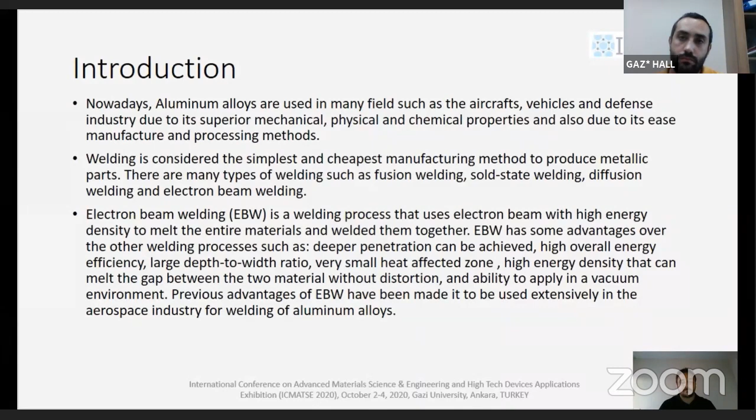Electron beam welding is a welding process that uses electron beam with high energy density to melt the entire materials and weld them together. Electron beam welding has some advantages over other welding processes, such as deeper penetration can be achieved, high overall energy efficiency, large depth-to-width ratio, very small heat affected zone, high energy density that can melt the gap between the two materials without distortion, and the ability to apply in a vacuum environment.

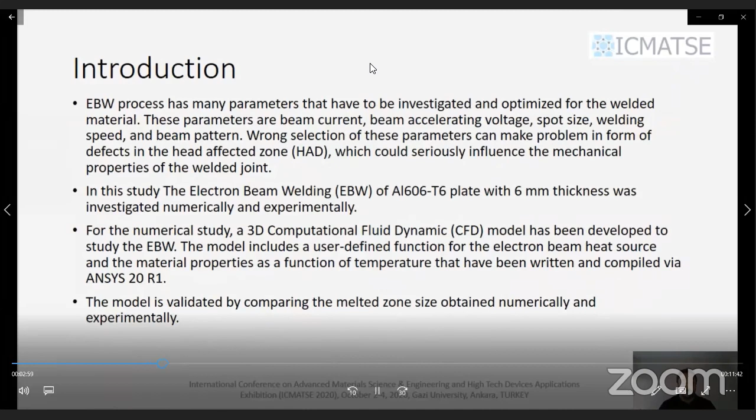Previous advantages of electron beam welding have made it useful extensively in the aerospace industry for welding of aluminum alloys. Electron beam welding process has many parameters that have to be investigated and optimized for the welded material. These parameters are beam current, beam accelerating voltage, spot size, welding speed, and beam pattern. Wrong selection of these parameters can cause problems in the form of defects in the heat affected zone, which could seriously influence the mechanical properties of the welded joint.

In this study, the electron beam welding of aluminum 6061 with the T6 condition plate, with 6 millimeters thickness, was investigated numerically and experimentally. For the numerical study, a 3D computational fluid dynamics model has been developed to study the electron beam welding. The model includes a user-defined function for the electron beam heat sources and the material properties as a function of temperature, which have been written and compiled via ANSYS 20 R1 software. The model is validated by comparing the melted zone size obtained numerically and experimentally.

Here is the model development section. The heat transfer from the electron beam sources to the specimens is simulated in the developed CFD model by using the heat transfer module in ANSYS Fluent software.

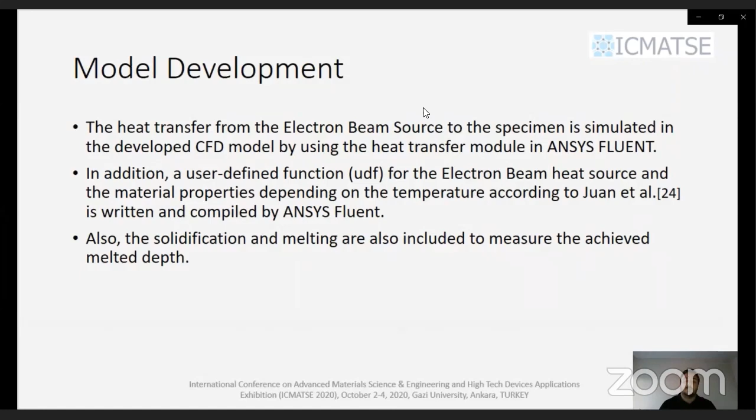In addition, a user-defined function for the electron beam welding heat source and the material properties depending on the temperature, according to Juan, is written and compiled by ANSYS Fluent software. Also, solidification and melting are included to measure the achieved melted depth.

Heat transfer model. The heat transfer from the electron beam source to the specimen can be described by the energy equation. The energy equation's parameters depend on variables such as temperature, density, specific heat, thermal conductivity, and electron beam heat sources.

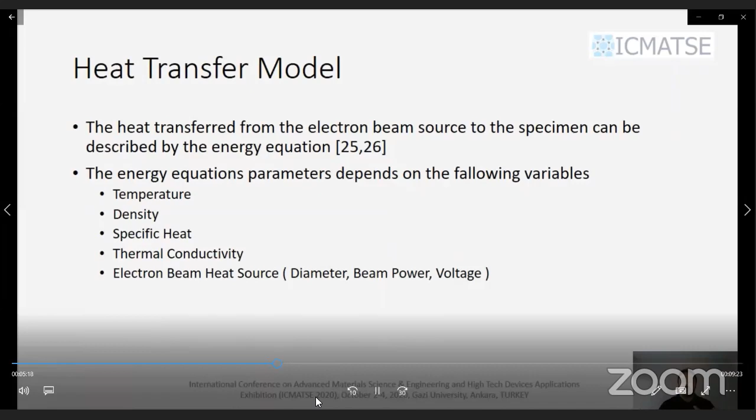The electron beam heat source depends on beam diameter, beam power, and voltage. Melting and solidification module: melting and solidification are taken into account, and the enthalpy technique is used to describe the melting and solidification that occurs during the welding process. The enthalpy technique is based mainly on the enthalpy of the material.

Here is the equation: H is equal to U plus P times V, or H is equal to minor H plus delta major H, where U is the internal energy, P is the pressure, V is the change in volume. Minor H is the sensible heat and delta H is the latent heat.

So minor H is equal to minor H reference plus Cp times delta T. Delta major H is equal to beta times L, where minor H reference, L, Cp, and beta are the reference enthalpy, the latent heat, specific heat, and the liquid fraction in the material respectively.

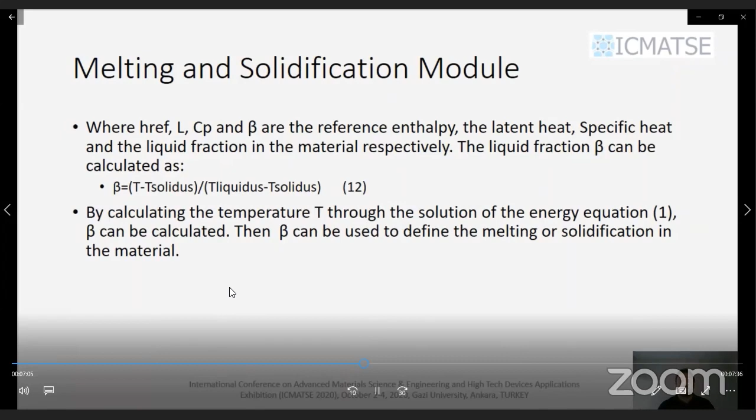The liquid fraction beta can be calculated as beta equals (T minus T solidus) over (T liquidus minus T solidus). By calculating the temperature T through the solution of the energy equation, beta can be calculated, and beta can then be used to define melting or solidification in the material.

Numerical solution: the equations described on the previous slides, including the heat transfer, solidification, and melting equations, are solved using ANSYS Fluent 20R1 software. Also, a user-defined function code that contains the electron beam welding parameters such as electron beam diameter and welding speed is compiled and solved. To validate the model, the obtained results are compared with the experimental results.

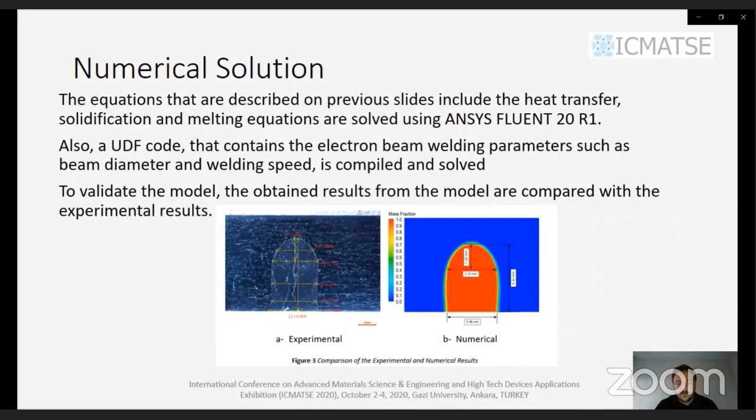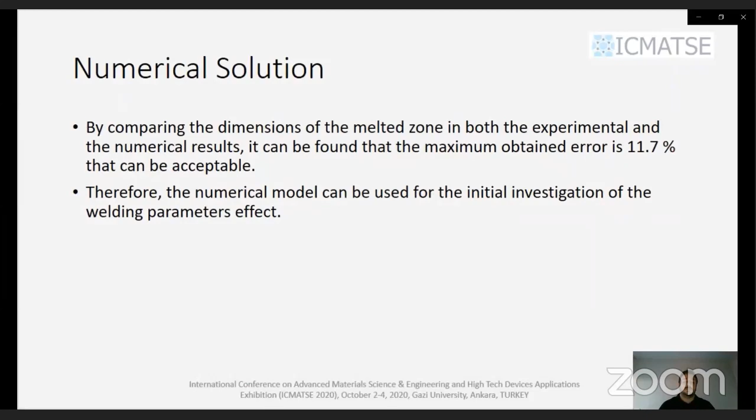Here you can see our calculated welding width is around 3.48, and the real one is 4.46. By comparing the dimensions of the melted zone in both the experimental and numerical results, it can be found that the maximum obtained error is around 11.7%, which is acceptable. Therefore, the numerical model can be used for the initial investigation of the welding parameters' effect.

Results and discussion. The numerical results from the computational fluid dynamics model can be used as a guide through the experimental work. The values of current, voltage, and welding speed are investigated through the model to make sure they can melt the whole thickness of the specimen.

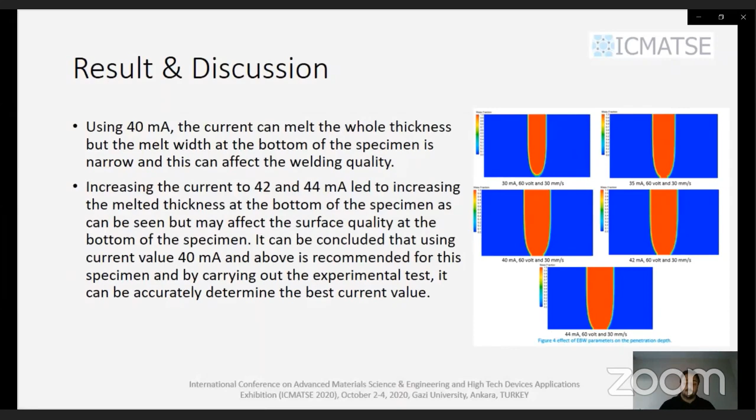For the experimental study, a 6 mm thick aluminum 6061 T6 condition aluminum alloy was used to prepare the welding specimen in the form of a tensile test according to ASTM E8/E8M 16A. No defects in the welding path can be seen for the tested specimen, as shown in figure 6.

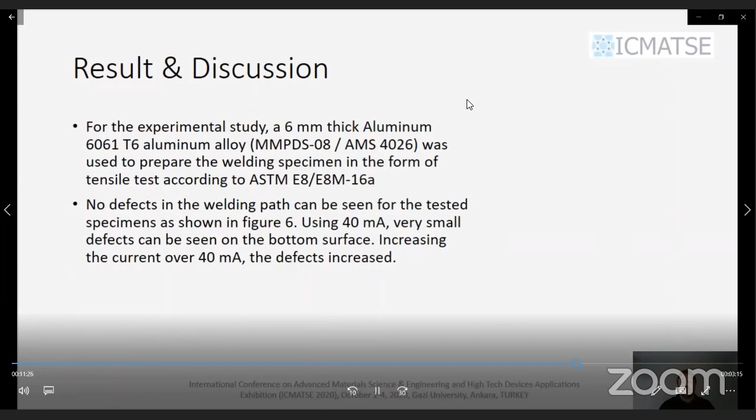Using 40 milliampere, very small defects can be seen on the bottom surface. Increasing the current over 40 milliampere, the defects also increase. Here you can see the results of the experimental values.

Therefore, it can be concluded that optimal parameters for the specimens are 40 mA, 60 volt, and 30 mm per second, based on the visual inspection of the top and bottom surface. More analysis is required to fully optimize the parameters for aluminum 6061 T6 condition.

Based on the micro hardness and tension test, which will be investigated in another study, in conclusion, this study investigated the electron beam welding of aluminum 6061 T6 condition both numerically and experimentally. A CFD model was developed to simulate the EBW process through a user-defined function written, compiled, and solved using ANSYS Fluent 20R1. The results from the CFD model were validated experimentally by comparing the melted zone numerically and experimentally.

Then the results from the model were used as a guide through the experimental work. The main results of this study are summarized as follows. According to the CFD model, using 60 volt, 30 mm per second, and beam current more than 35 mA can melt the specimen thickness. From the experimental work, using 60 volt, 30 mm per second, and beam current more than 40 mA can cause defects on the bottom of the specimen.

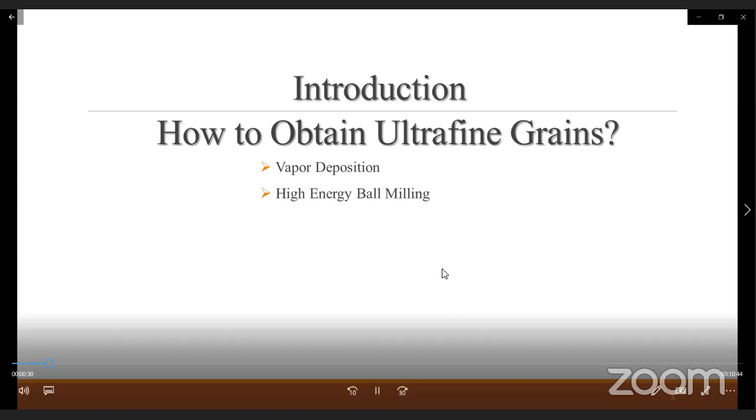We have four different techniques. The first one is vapor deposition, the second one is high energy ball milling, the third one is fast solidification, and the final one, which we are interested in, is severe plastic deformation.

What is SPD? SPD is a method of processing metals to create bulk material comprised of nanostructures. So basically, we turn coarse grains into smaller grains as a result of the SPD.

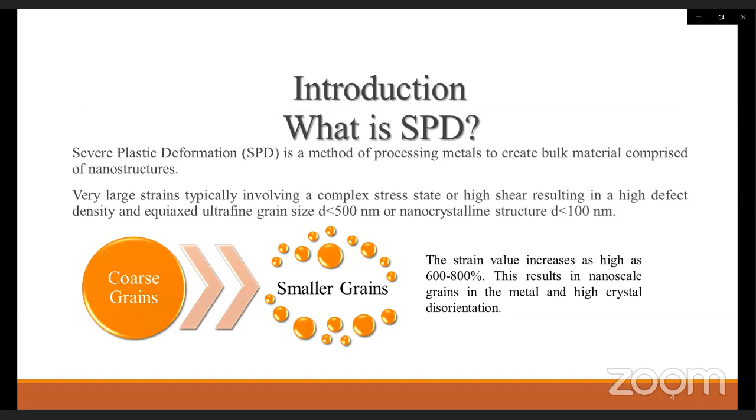As the grains get finer, we get higher strength, and as a result of this, we get fracture toughness. So the ultra-fine grains were obtained using the equal channel angular pressing technique, which is a severe plastic deformation method.

As the grains get finer, the mechanical properties of the material increase significantly according to the Hall-Petch relation, as shown on the screen.

In this present study, 2024 quality aluminum alloy was subjected to ECAP with 1, 2, 3, and 4 pass cycles after solution heat treatment, and then these samples were aged at 175 degrees centigrade for 8 hours. After the aging, the hardness values and optical microstructures of the samples were investigated.

The hardness of the material decreases when 2024 quality aluminum was pressed with ECAP and then aged. The hardness decrease ratio after aging was found to be directly proportional to the sample's number of passes through the ECAP.

So let me explain the ECAP die briefly. We have a billet pressed through a die consisting of two channels with identical cross sections intersecting at an angle between 60 to 135 degrees, with a rounded or zero corner.

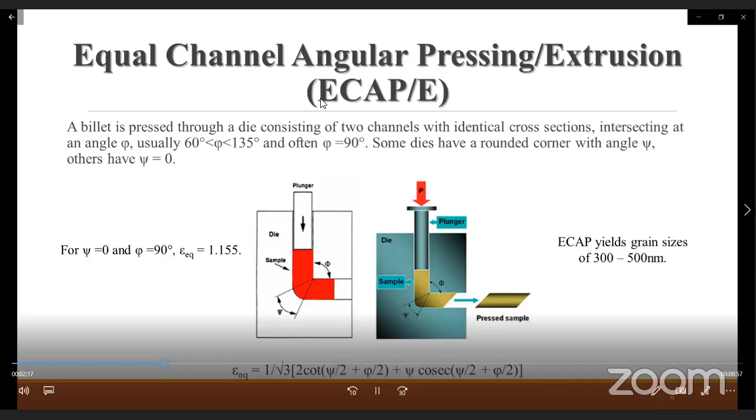And this is the basic strain formula with the angles, and with the 0 and 90 degree values we get the strain of 1.155, and with ECAP we can get 300 and 500 nanometer grain sizes.

For the material and method section, we have used 2024 aluminum alloy in this study. The composition is shown on the table, and the aim of this study is to investigate the hardness and microstructural properties of 2024 aluminum post ECAP aging at 175 degrees for 8 hours.

The ECAP die process is carried out at room temperature with 1 pass, 2 passes, 3 passes, and 4 passes, with an ECAP die having an angle of 135 degrees. The ECAP die's technical drawing is shown on the screen. These are the exact dimensions.

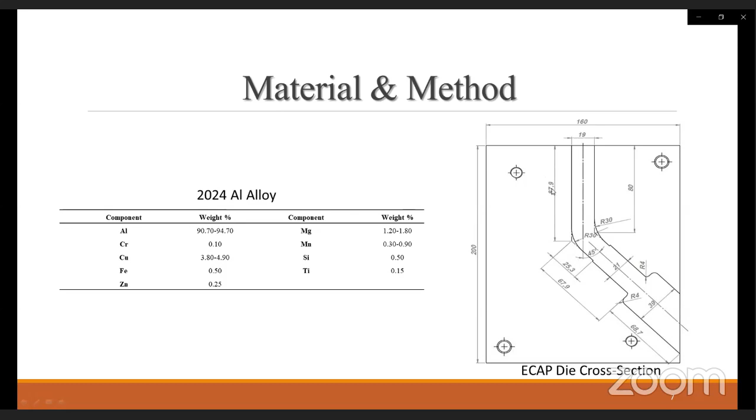After all these works are finished, the die is assembled carefully. The outer shell is also assembled in the die to prevent it opening during operation. The channel has a cross-section with lengths of 19 mm for each side. Hence, the samples are machined to 18.95 mm in the cross-sectional dimension and 40 mm in longitudinal dimension.

Then the ECAP die is assembled as shown. We have assembled this ECAP die into this outer shell. The samples are solutionized at 525 centigrade degrees for 2 hours before ECAP. After solutionizing, the samples are pressed at 12 mm per second and at room temperature.

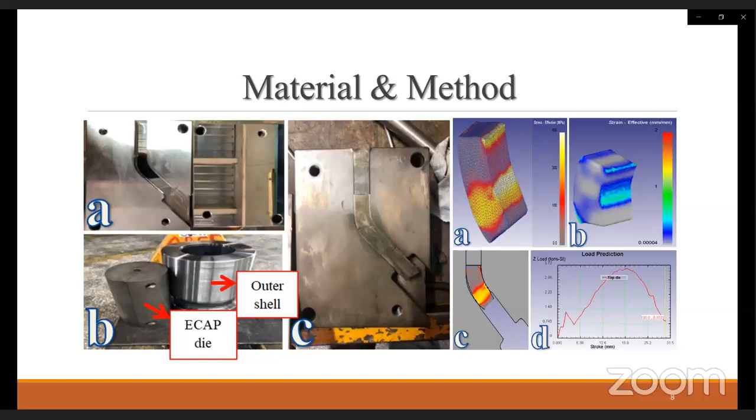Then the aging operation is carried out with the parts. The samples are put in an electrically heated laboratory type furnace and aging is carried out at 175 degrees for 8 hours. After the aging, the microstructures and the hardness values are investigated. First of all, let us see the microstructures.

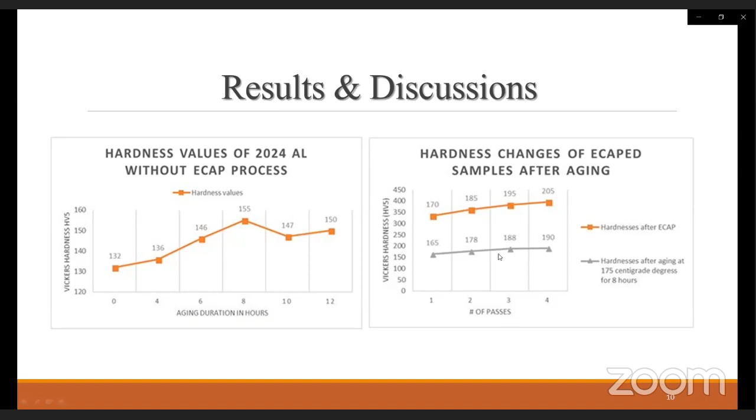As we can see, the decrease in hardness for 1 pass is about 5, while for 4 passes it is 15.

Let us move to the conclusion. ECAP is one of the essential methods for SPD applications. By applying ECAP, grain refinement is obtained through the formation of new high-angle grain boundaries. In addition, high dislocation density is obtained with ECAP. Therefore, the hardness of samples passed through ECAP increases as the number of passes increases.

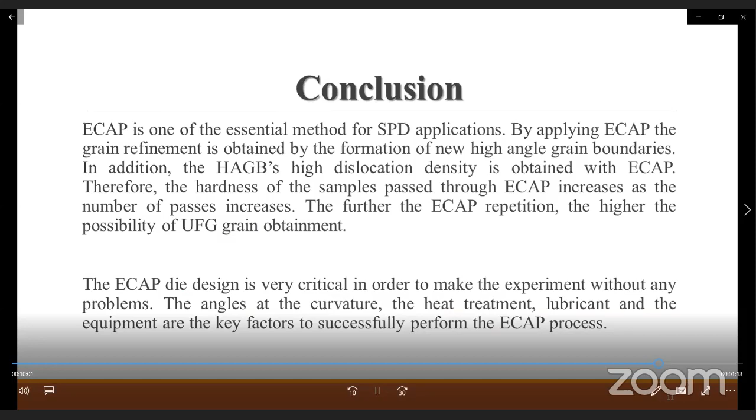The further the ECAP repetition, the higher the possibility of obtaining ultrafine grains. The ECAP die design is very critical for performing the experiment without problems. The angles at the curvature, heat treatment, lubricant, and equipment are key factors for successfully performing the ECAP process.

Aging after ECAP decreases the hardness due to nucleation on segregated atoms located at the dislocation zones. High dislocations could cause overaged conditions in the material, and high dislocation density increases the probability of dislocation annihilation due to the short distances between dislocations.

By using SPD methods, especially ECAP, significant grain refinement and the potential for producing advanced engineering materials with superior properties—strength, ductility, and good fatigue characteristics—can be achieved. These UFG structures lead to increased strength, but may also cause weakening if processing conditions introduce significant changes in precipitate morphology. If the UFGs are reasonably stable at elevated temperatures, there is potential for achieving excellent superplastic properties.

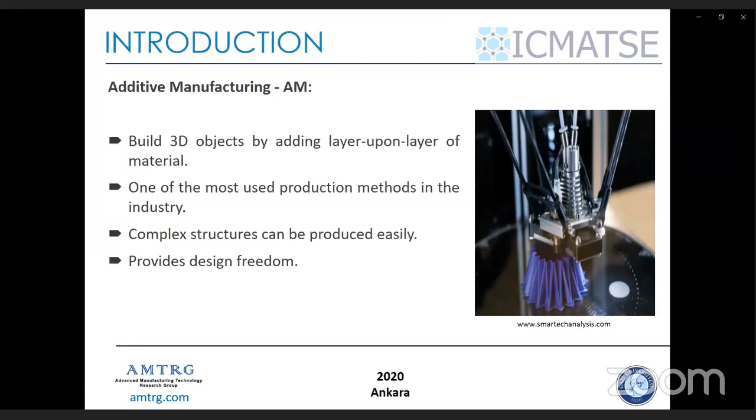Firstly, I want to explain what additive manufacturing is. Additive manufacturing is the process of taking design data from the digital domain and producing it by adding material layer by layer. The most important advantage is that the designer can freely develop a model without questioning its manufacturability.

The additive manufacturing process flow is as follows: 1. CAD 3D model, 2. STL file creation, 3. sliced layers, 4. printing, 5. post-printing processing.

Structural optimization can be defined as the process of choosing the best variable from among applicable solutions. It can be used for weight reduction, maximum rigidity, natural frequency reduction, and maximizing heat conduction. Topology optimization, size optimization, and shape optimization are generally used as structural optimization methods.

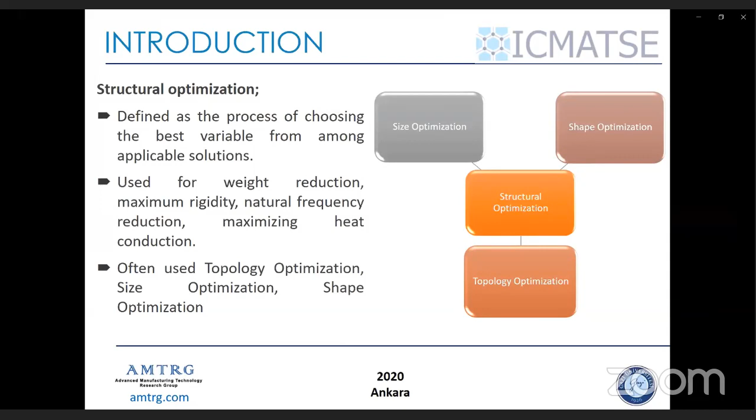We used topology optimization in our study. Topology optimization is used to find the best material distribution on the model and to reach optimum weight by removing materials from unnecessary areas.

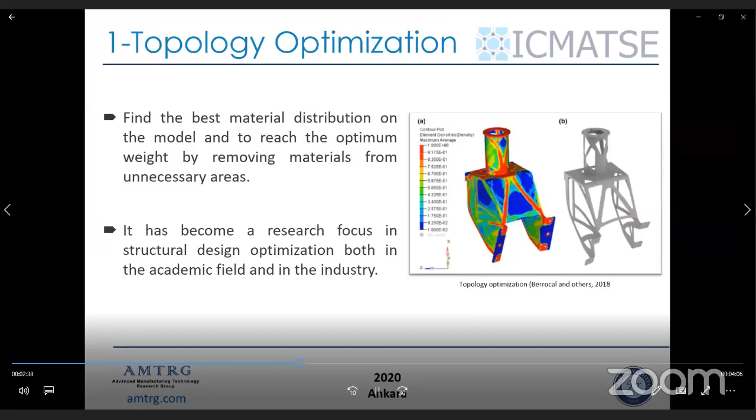We chose a bearing bracket of aircraft for topology optimization. The bearing bracket is a common component in the control surfaces of various aircraft, and redesigning the bracket for additive manufacturing can significantly save weight and help reduce aircraft fuel consumption.

Firstly, we prepared the CAD model and applied mesh structure. Then we divided the model into design and non-design area. Design area was shown with dark blue and non-design area was shown with light blue.

After this is finished, other parameters that should be used during optimization are determined. These parameters may be forces and boundary conditions, constraints, objective function, etc. The desired regions were fixed with one-dimensional rigid elements, and we applied 3 loads in X, Y, Z direction.

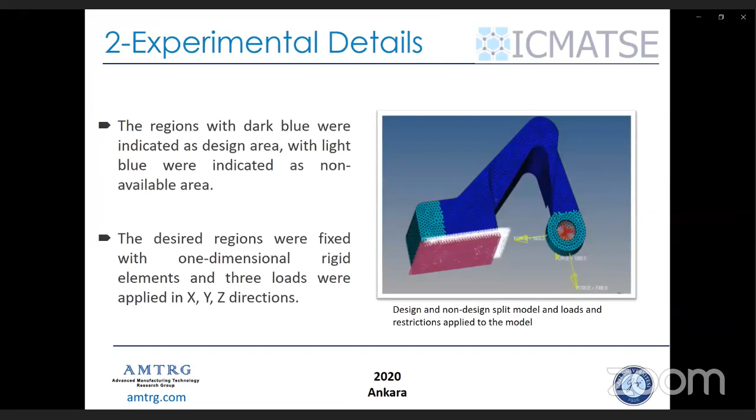We used the OptiStruct module of HyperMesh for topology optimization and static analysis. After topology optimization, HyperMesh gave us this design, and then we prepared our own design by taking this model as an example.

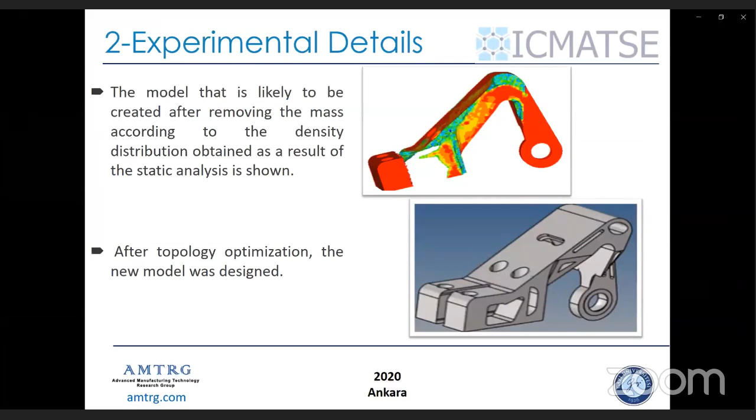After that, we used Netfabb in our study. Netfabb provides a complete workflow from start to finish, and this provides a fast and easy method. Using Netfabb simulation, support materials were defined and production analysis was made.

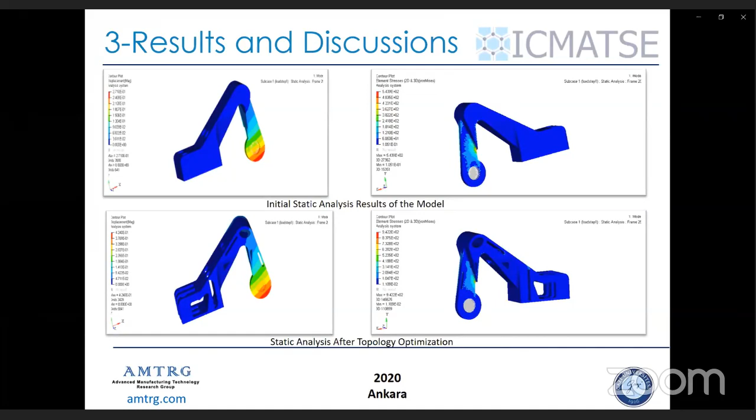Here we have shown our analysis results of both the existing model and the new redesign. Looking at the maximum stress results, it was observed that the stress value increased after topology optimization, but this result is below yield stress and can be neglected.

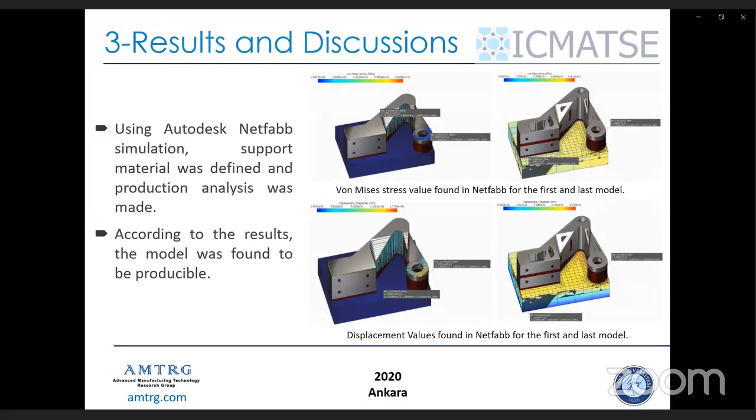I can say there was a 30% reduction in weight, and according to Netfabb simulation results, the model was found to be producible.

In this study, the aim was to show the effect of topology optimization on weight, displacement, and stress, with the analysis carried out and the data obtained. It was observed that there was a 30% reduction in weight.

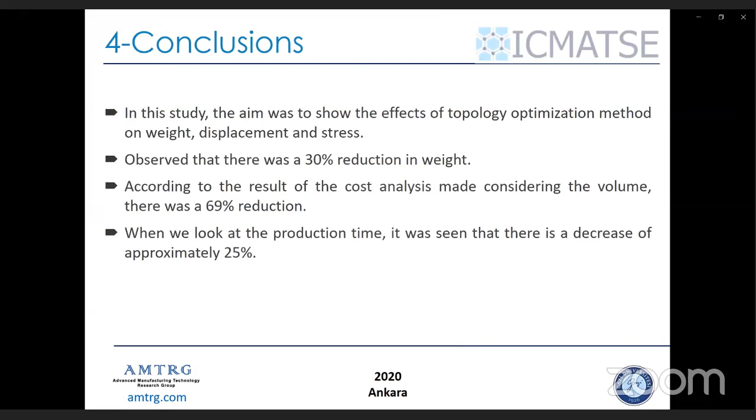Later, we applied cost analysis. We saw a 69% reduction. Finally, when we look at production time, it was seen that there is a decrease of approximately 25%.

Thank you, my presentation is finished.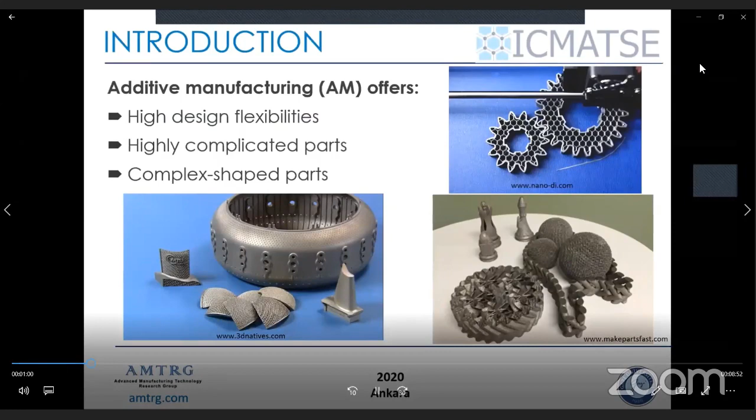Due to these advantages, it has become a preferred method, especially in the fields of aerospace industries, architectural, dental, automotive, furniture, and biomedical.

However, these parts cannot be directly used in the industry without post-processing. The high surface roughness value of these parts is one of the reasons for this situation.

As you see here, there are two samples which are produced by two different additive manufacturing techniques. The material of the first part is Inconel 625 and it is produced with SLM technology, which is selective laser melting, and the material of the second part is a titanium alloy produced with electron beam melting technology.

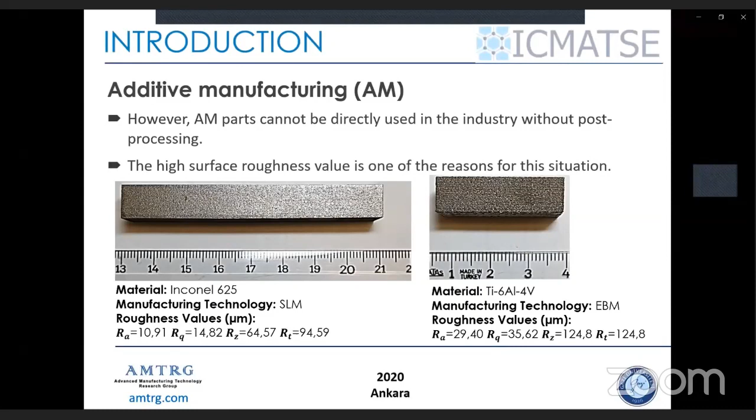So, laser polishing is an innovative part finishing technique that can be used to reduce the surface roughness by melting a thin layer of material on the part surface. Laser polishing involves melting a thin layer of the substrate with surface tension, causing the material to flow from peaks to valleys.

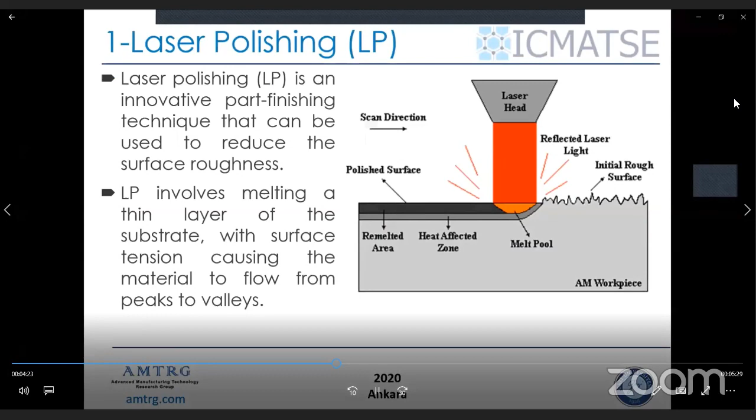Laser power was selected as 285 watts. Laser scan speed was 960 millimeters per second and the powder particle size was 10 to 40 micrometers. And then the actual laser polishing was applied on this surface.

Laser polishing was processed on the surface of the SLM Inconel 625 part using the laser parameters given in the table. The laser power was selected as 600 watts. Laser scan speed was 200 millimeters per second. Hatch distance, which can be defined as the distance between two laser tracks, was 0.03 millimeters. Pulse frequency was 1000 Hz and pulse duration was 0.0008 seconds.

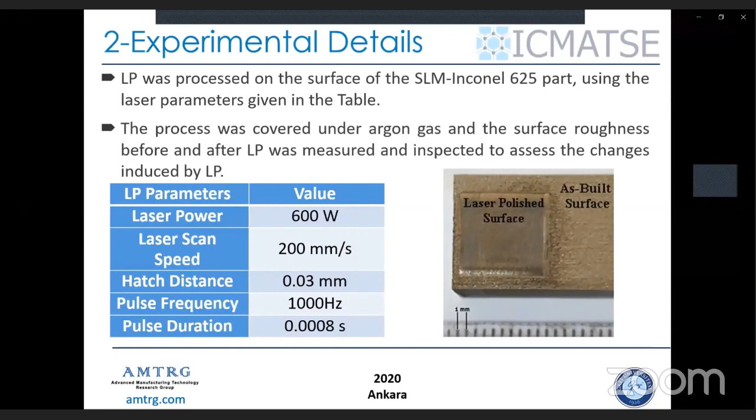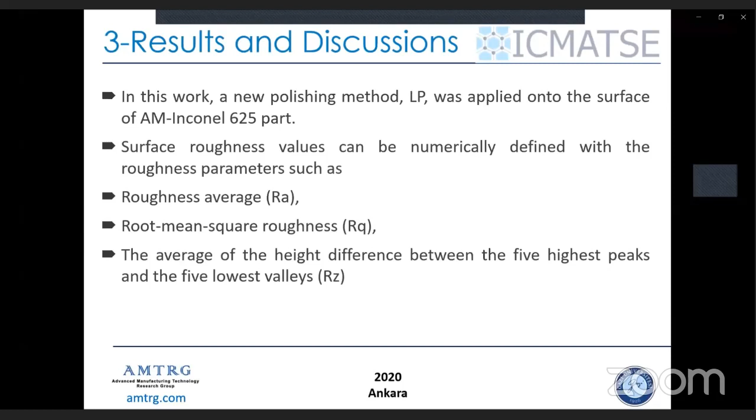In this work, a new polishing method, laser polishing, was applied onto the surface of an additive manufacturing Inconel 625 part. Surface roughness values can be numerically defined with roughness parameters such as roughness average RA, root mean square roughness RQ, and the average height difference between the 5 highest peaks and the 5 lowest valleys, RZ.

As can be seen in the figures, the surface roughness has decreased significantly. The right side of the figures represents the as-built surface, while the left side represents the laser polished surface.

Roughness values of the as-built surface, RA, RQ, and RZ, were 10.91 micrometers, 14.82 micrometers, and 64.57 micrometers respectively. And when we check the laser polished surface, RA, RQ, and RZ were 2.34 micrometers, 2.84 micrometers, and 10.76 micrometers respectively.

Besides, we can observe the layer thickness of the parts from the as-built surface, and the laser hatch distance, which I mentioned before as the distance between two laser tracks, can be observed from the laser polished surface in the figures.

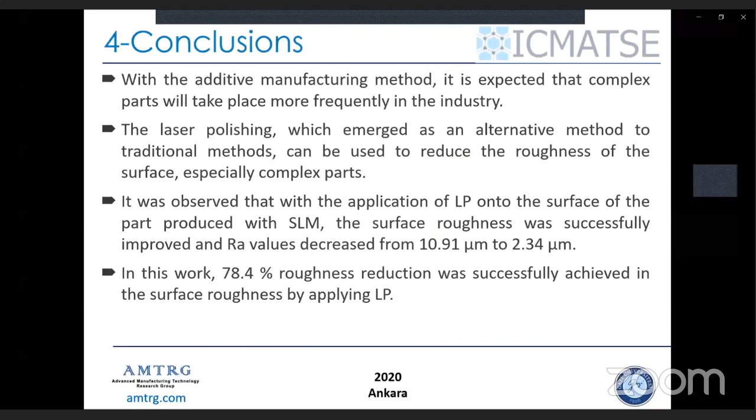Thank you for listening to me, and if you have any questions, I will be happy to answer them now.

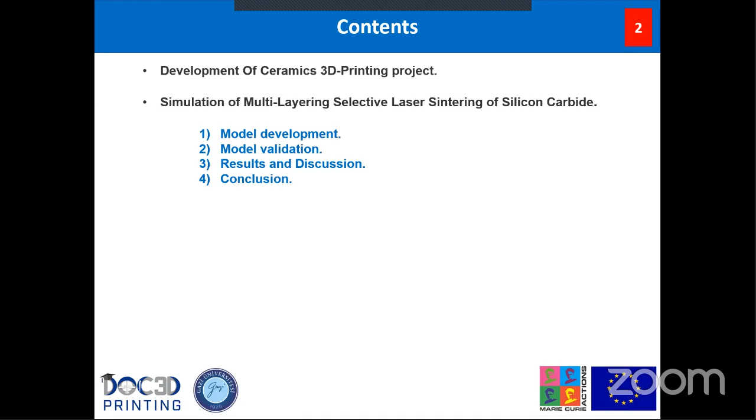The content of my presentation: first I will talk about the development of the ceramics printing project, and then about the paper on simulation of multi-layer selective laser sintering of silicon carbide. For the paper, I will discuss the model we developed, the validation of this model, the results, discussion, and the conclusion from this study.

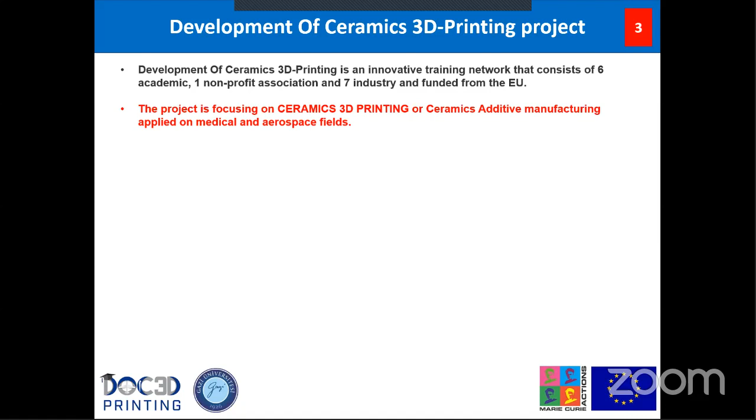The ceramic 3D printing project is funded by the EU, and it contains 6 academic partners, 1 non-profit association, and 7 industrial companies. The project is mainly focusing on 3D printing and manufacturing of ceramic material, and there are 14 students working in this project. Two of them are here in Turkey - one at Gazi University, me, and another student at Ermeksan company in Bursa.

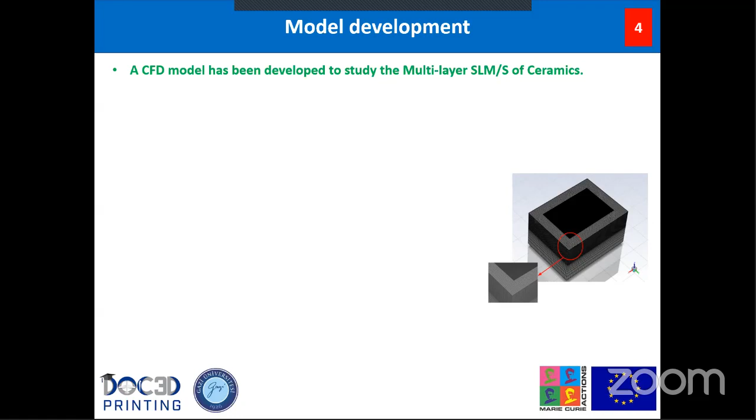For our paper, we developed a CFD model that can simulate multi-layer SLM and SLS for ceramic material. The model works as follows: first, the laser scans a layer, and after finishing the first layer, another layer is deposited on top of it, and the laser scans that layer. This continues until the whole part is finished.

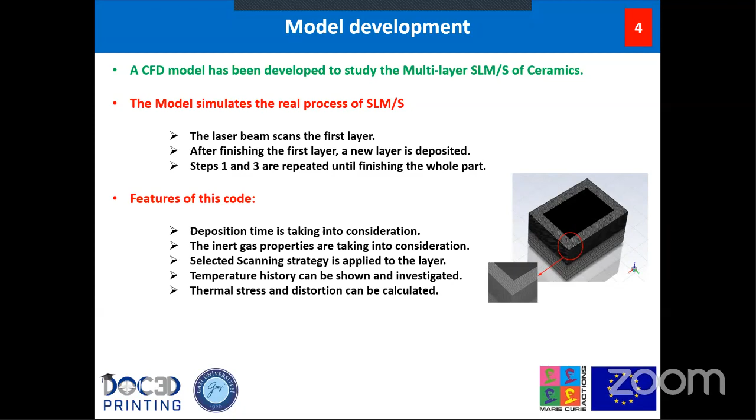The developed code has some features: first, the deposition time is taken into consideration, and inert gas properties are included. You can also select the scanning strategy to be applied to the layer, and obtain the temperature history during the scanning process from this model. Finally, you can calculate the thermal stress and distortion of the part you produce.

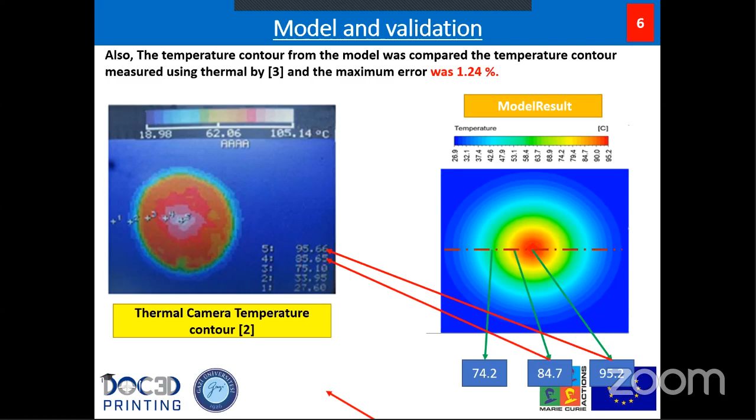For model validation, we validated our model with data available in literature, comparing it with the work of Sang, and found a very close identity between the two results, with a maximum error of 3.35%. We also made another validation comparing the temperature contour from the model with the contour from a thermal camera, and again found very close identity between the two results, as you can see.

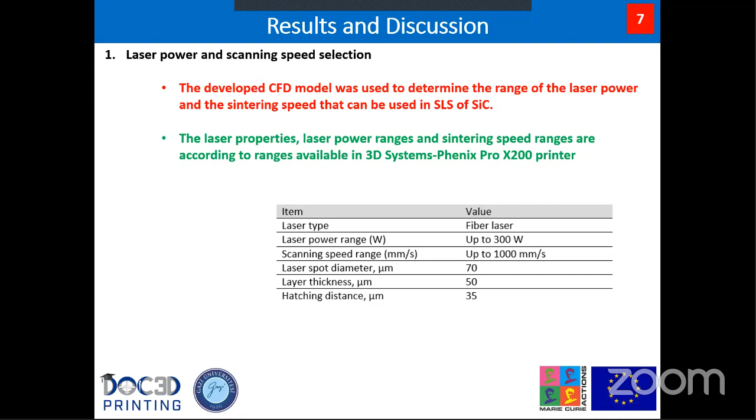For the results and discussion, first we studied the laser power and scanning speed that can be used in SLS of silicon carbide. We used a range of laser power and scanning speed according to the printer manufactured by 3D Systems company, where the laser type used is fiber laser, with laser power up to 300 watts and scanning speed up to 1000 millimeters per second. Laser spot diameter is 70 micrometers, layer thickness used in the model is 50 micrometers, and hatching distance is 35 micrometers.

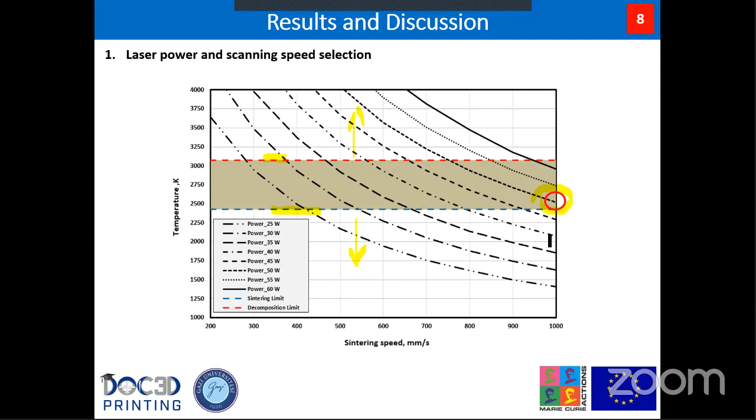In our study, we used a laser power of 50 watts and scanning speed of 1000 millimeters per second. After that, we studied the effect of the scanning strategy and build orientation, where we used this scanning strategy and build orientation in our study, using 50 watts for laser power and 1000 millimeters per second for scanning speed.

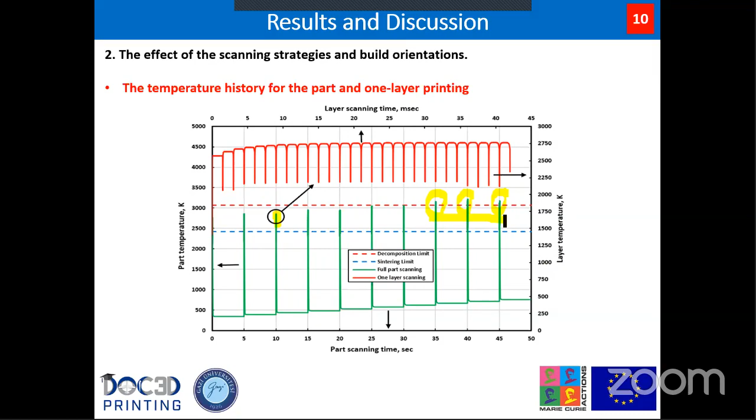If we see the temperature history for layer number 9, we can see that all the scanning is above the decomposition limit, and this is the problem. So how to solve this problem? It can be solved by controlling the temperature or controlling the scanning speed.

The temperature can be controlled using a controller for the power, where we can reduce the power according to the number of layers. So we updated our model and included a subroutine for laser power control during building. When we applied this subroutine, we can see that the scanning is below the decomposition limit for layer number 9.

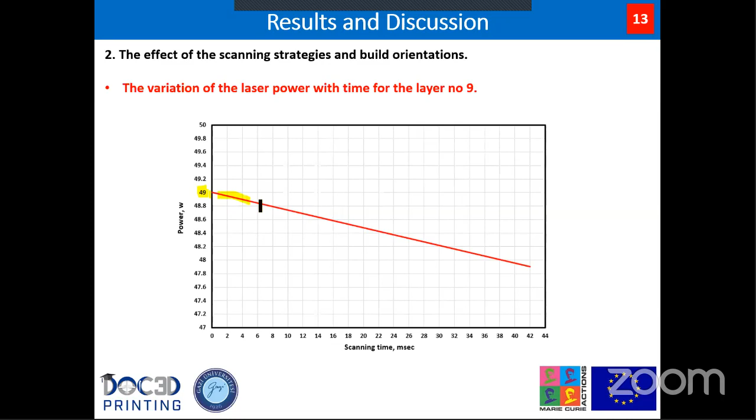We also obtained the variation of laser power with time during scanning of layer number 9. We can see that the subroutine makes the power start at 49 watts. Although we used 50 watts in the model, the subroutine reduces the power to 49 because of the heat accumulated inside the part, and during scanning it is reduced further, down to 47.9 watts.

For thermal stress and deformation contour, we obtained from the model the temperature distribution for the printed part. We studied the thermal stress and deformation at 1500 Kelvin, and when we calculated the thermal stress, we found that the stress is high, above the yield limit. But you cannot use this figure alone to determine if there is a problem, like cracks, in the part.

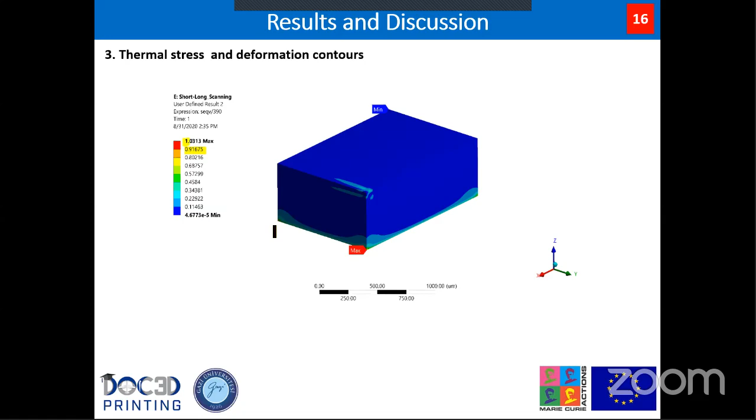So we normalized this stress, meaning we divided it by the yield stress. This is the normalized stress. A stress above 1 means yielding happened, so there are cracks or defects in the part; any values below 1 mean no problem. In this part we exceeded 1, so we have cracks and defects that will happen during printing. So how to solve this problem?

It can be solved using preheating. When we preheat the part during printing using 500 Kelvin, we can see that the thermal stress reduced to 0.86. So preheating is very important for SLS and SLM of ceramic material.

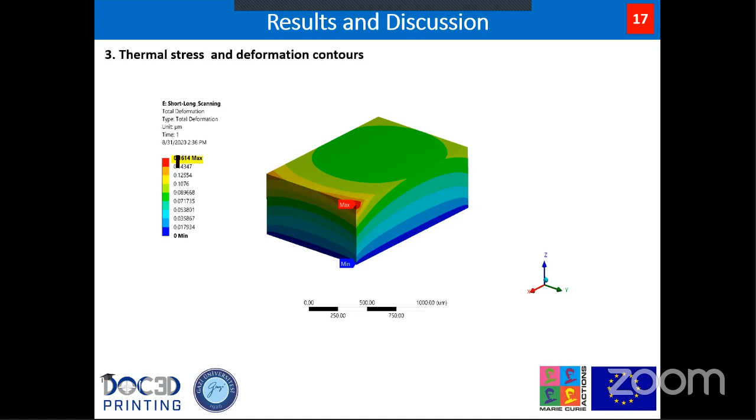The distortion also decreased. The distortion before preheating was 0.16, but after we applied preheating in the model, the distortion reduced to 0.14.

So the conclusion of this study: first, the developed model can provide us with the temperature history and the temperature distribution, and we can use this temperature distribution for the calculation of the thermal stress and also the distortion inside the part.

Also, for ceramic material, it is important to apply a temperature controller during the printing process, because the low thermal conductivity of ceramic material causes heat to accumulate inside the part, and during printing the heat will exceed the decomposition limit. So it is important to consider a controller for the laser power.

Also, it is important to include preheating for the chamber, because the sintering point, or melting point, for ceramic material is very high, more than 2000 Celsius. To reach that temperature from room temperature is a very high jump, and cracks will be developed. So we need to reduce this difference by preheating. It is important to apply preheating for ceramic material.

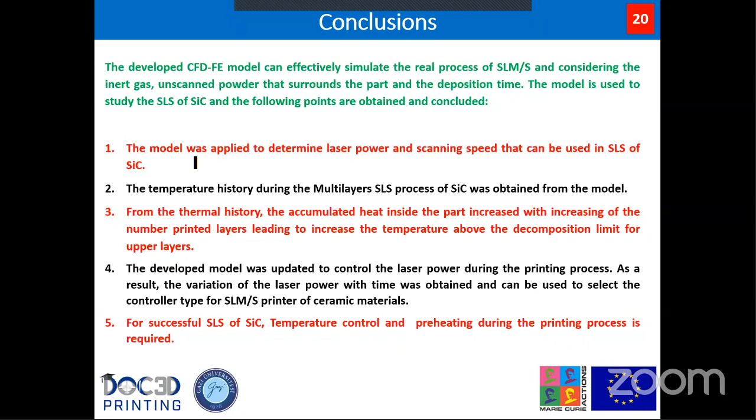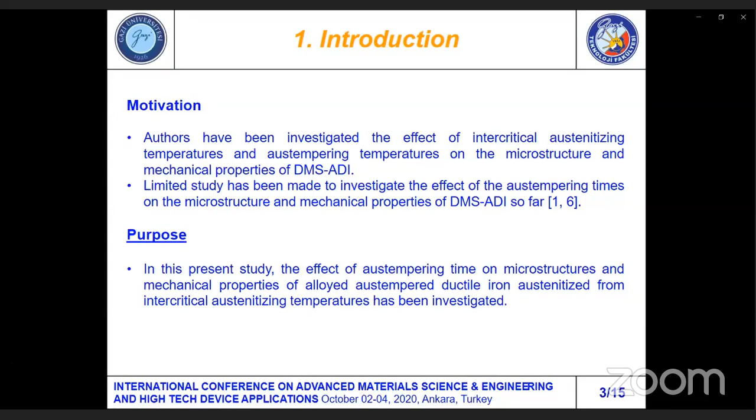The ductile iron was produced in a medium-frequency induction furnace in a commercial foundry. The Tundish-Cover ladle method was used to treat a 500 kg melt of iron with 6-7% magnesium-containing ferrosilicon at 1450 Celsius. Final inoculation was carried out with a 75% ferrosilicon alloy. The melt, at a temperature between 1400 and 1450 Celsius, was cast into Y-blocks and molds, which were prepared in accordance with ISO 1083 standards. The tensile samples were machined from the Y-blocks by bar turning.

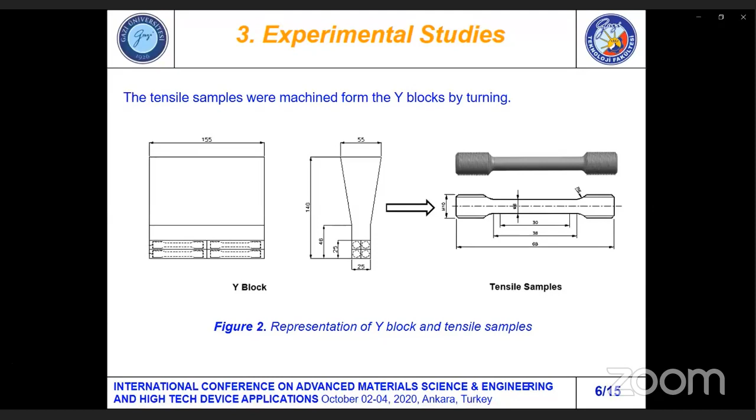Here you see the tensile sample positions in the Y-blocks. The tensile samples were intercritically austenitized at 800 Celsius for 30 minutes and then rapidly transferred to a salt bath containing 50% potassium nitrate plus 50% sodium nitrate.

The salt bath was isothermally held at 350 Celsius for 45 minutes, 60 minutes, 90 minutes, 120 minutes, and 180 minutes.

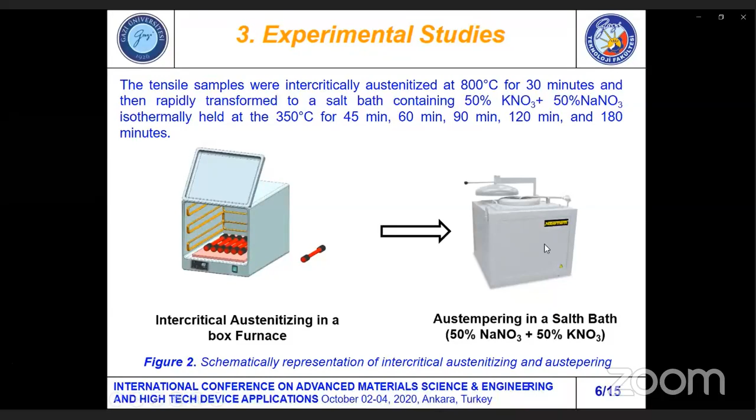Here you see the schematic representation of the box furnace we used for intercritical austenitizing. We rapidly transferred the tensile samples into a salt bath; here is the schematic representation.

Materials characterization samples were cut from the undeformed zone of the tensile bars and hot mounted for mechanical grinding and polishing, with up to 0.5 micron colloidal silica suspension, and finally the samples were etched with a 2% nital solution.

We used a Leica DMI 5000M optical microscope for microstructural observation. The volume fraction of ausferrite and proeutectoid ferrite was calculated using Leica Application Suite image analysis software, version 5.2.

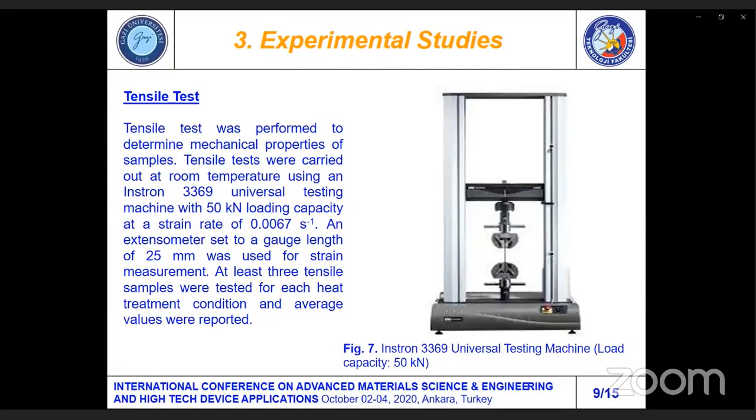Tensile tests were performed to determine the mechanical properties of samples. Tests were carried out at room temperature using an Instron 3369 universal testing machine with 50 kN loading capacity at a strain rate of 0.0067 per second. An extensometer set to a gauge length of 25 mm was used for strain measurement. At least 3 tensile samples were tested for each heat treatment condition, and average values are reported in the paper.

The optical microstructures of the dual matrix structure alloy according to austempering times are provided in Fig. 1. Fig. A is 45 minutes, Fig. B is 60 minutes, Fig. C is 90 minutes, Fig. D is 120 minutes, and Fig. E is 180 minutes.

Dual matrix structures are clearly observed at all austempering times. No significant change is observed in the ausferrite volume fraction, which remains constant at around 15 to 20% across all austempering times. However, the ausferritic structure became more considerably clear with increased austempering time. Moreover, no significant effect has been observed on the morphology of ausferrite depending on the austempering times.

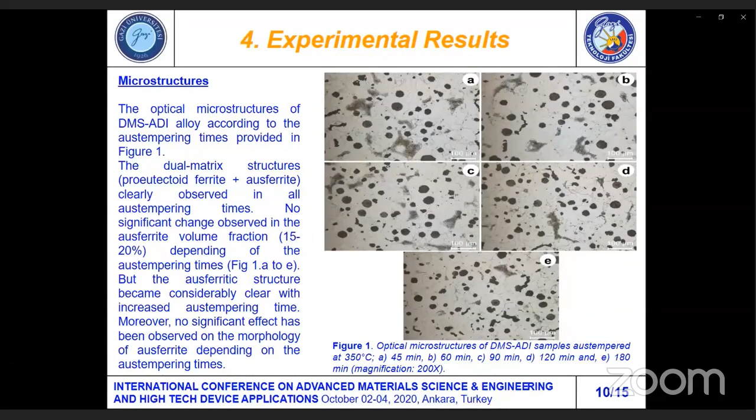Short and long austempering times can cause deteriorated mechanical properties in austempered ductile iron. Similarly, after 120 minutes austempering time, the tensile properties of samples decreased in dual matrix structure austempered ductile iron. The reduction of tensile properties after 120 minutes is attributed to the decomposition of high carbon austenite, decomposing into bainitic ferrite and carbides during further austempering times.

In final conclusion, the proeutectoid ferrite plus ausferrite microstructure can be produced in alloyed ductile iron by intercritical austenitizing and austempering heat treatment process. The optimum combination of strength and ductility can be obtained by changing austempering times at a constant ausferrite volume fraction in dual matrix structure austempered ductile iron.

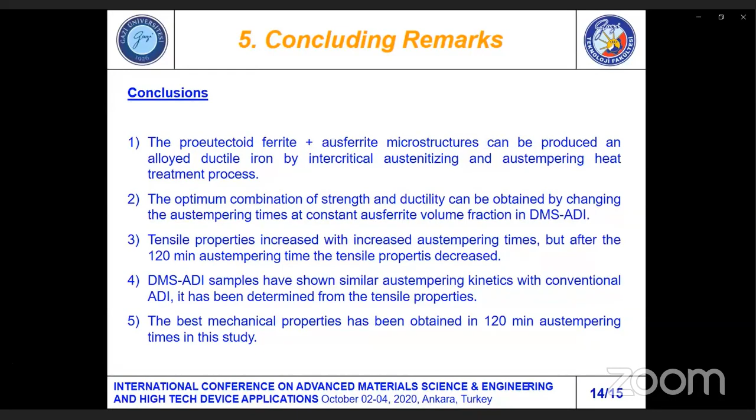Tensile properties increased with increased austempering times, but after 120 minutes austempering time, the tensile properties decreased. Dual matrix structure austempered ductile iron samples have shown similar austempering kinetics to conventional austempered ductile iron, as determined from the tensile properties. The best mechanical properties were obtained at 120 minutes austempering time in this study.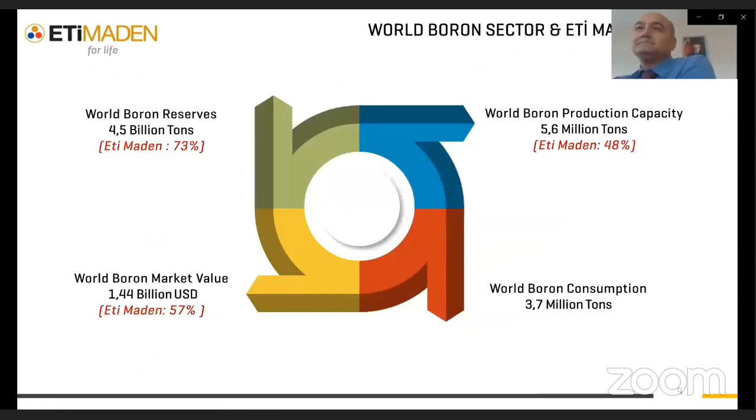These are the boron production centers for Eti Maden: Bandırma Boron and Acid Works located in Balıkesir, Bandırma; Emet Boron Works in Kütahya, Emet; Bigadiç Boron Works in Balıkesir, Bigadiç; and Kırka Boron Works in Eskişehir. Beylikova Fluorite, Barite and Rare Earth Elements Works is a new working area for Eti Maden, located in Beylikova, Eskişehir. The General Directorate of Eti Maden is located in Ankara, the capital of Turkey.

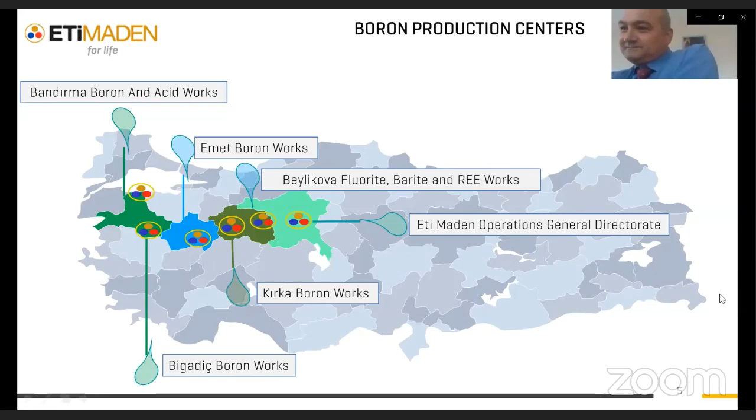Eti Maden has 33 facilities and 4 boron works, as I said before: Bandırma, Bigadiç, Kırka, and Emet. In this work, we are producing 22 boron products, including ground colemanite, ground ulexite, concentrated colemanite, concentrated ulexite, granular colemanite, granular ulexite, borax decahydrate, boric acid, Etidot 67, calcined tincal, sodium perborate, Etibor 48, Etibor 68, boron cleaning products, Eticol Ceramic, boron oxide, zinc borate, Eti-K boron, Eti-K dot, ABCOL 3367, Borel, and Eticol 43.

Eti Maden can produce all boron products used in industrial areas. These are the products and usage areas, starting from boron ore, going to advanced technology of boron. From boron ore we get colemanite, tincal, and ulexite, and Turkey is the major source of colemanite and tincal.

Concentrated boron products are used in glass, ceramics, agriculture, the iron and steel industry, and in cleaning. Concentrated colemanite and concentrated ulexite are used in these productions.

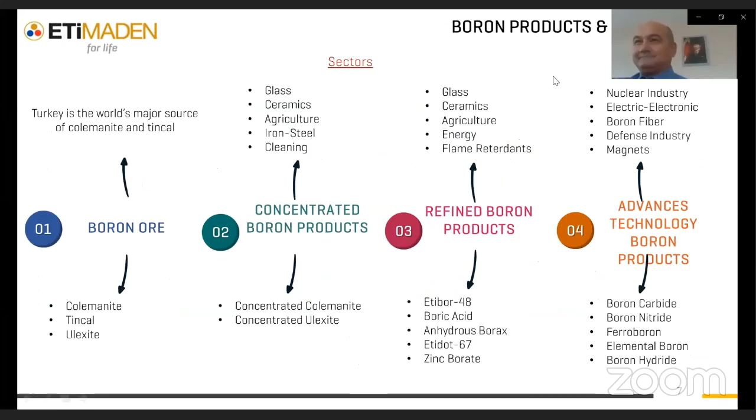These are the percentages of boron products by usage area. 48% of boron is used in glass production, 15% used in agriculture as a fertilizer and insecticide, 15% used as ceramic, 3% in detergent, and 19% in other industries. Boron products mainly used in glass, ceramics, and agriculture sectors are not the main component, but included as an additive in the final product, at rates ranging from 0.01 to 25%.

As an example, in glass it's used from 5 to 15%. In ceramics it's used at a maximum of 25%, and in agriculture it's used about 20%.

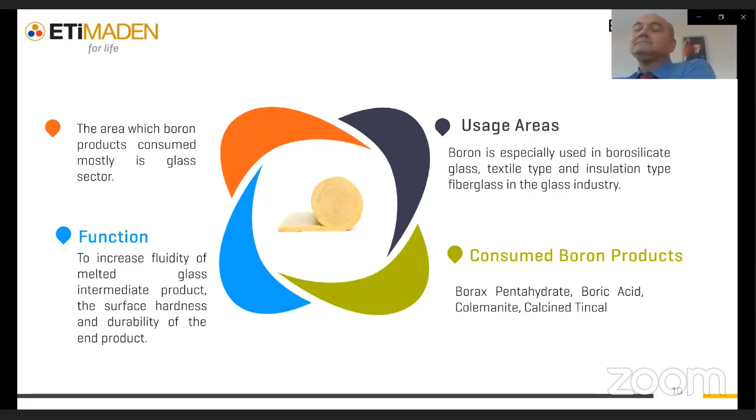And the next slide will come.

Boron usage in agriculture: the main aim for usage of boron is as a fertilizer, microfertilizer, herbicide, pesticide, and wood protection. Consumed boron products are borax pentahydrate, borax decahydrate, disodium octoborate tetrahydrate. Its function is to increase flowering, fertilization, and fruitfulness of the plant, to make the plant more resistant against damages, and to increase yield and quality of the plants. The products used are Etidot 67, ABCOL 3367, Eti-Kdot, and Eticol 43.

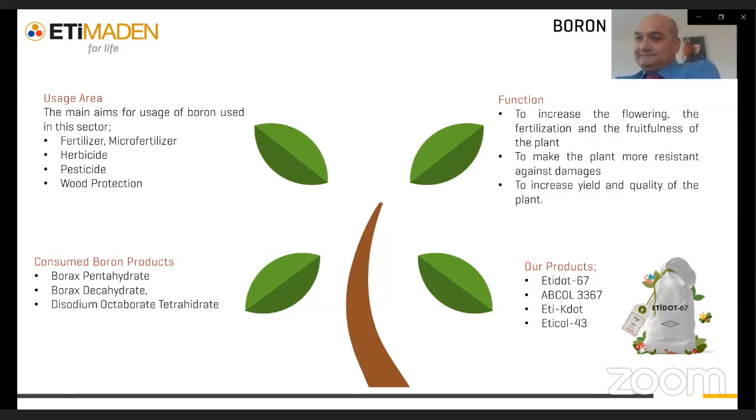Next slide: here is boron used in the energy sector. Boron is a hydrogen carrier as sodium borohydride and ammonium borane. They are used in nuclear applications as a neutron absorbent and for storage of nuclear waste. Magnesium diboride is superconductive and transfers energy without loss, and neodymium iron boron magnets are used in industry.

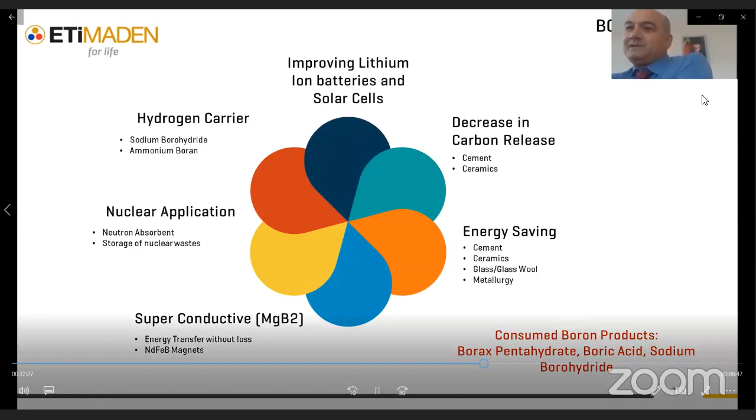Boron decreases carbon release in cement and ceramics production. Boron usage also saves energy in the cement, ceramics, glass, glass wool, and metallurgy sectors. In this area, borax pentahydrate, boric acid, and sodium borohydride are used.

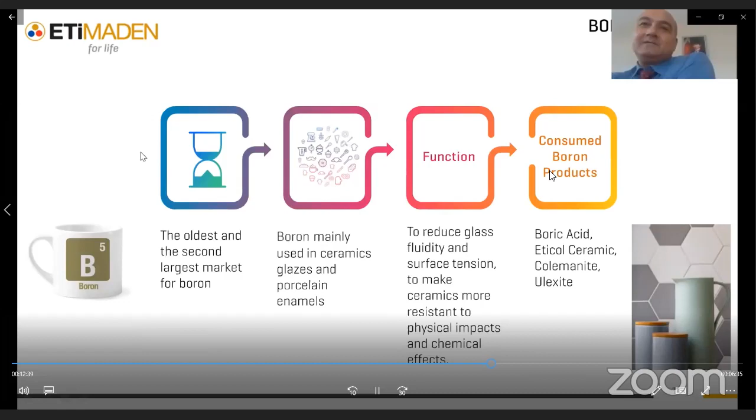Here is some usage of boron in ceramics. The ceramic sector is the oldest and second largest market for boron. Boron is mainly used in ceramics, glazes, and porcelain enamels to reduce glass fluidity and surface tension, and to make ceramics more resistant to physical impacts and chemical effects. In this area, boric acid, Eticol Ceramic, colemanite, and ulexite are used.

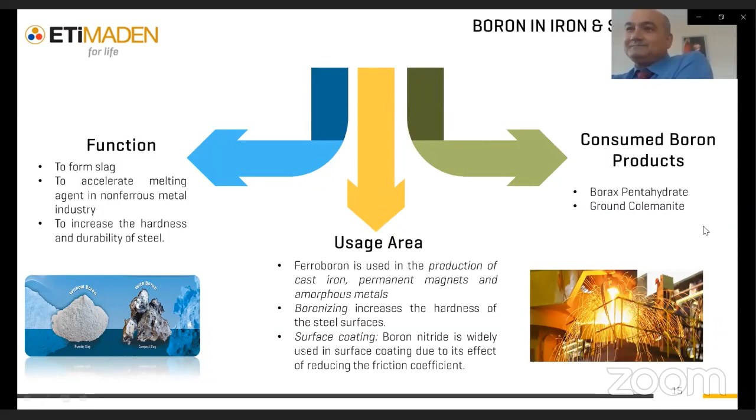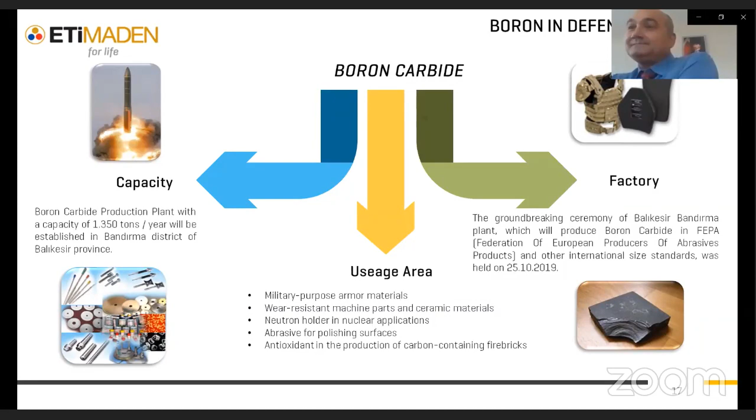Here is boron nitride, another compound used in the defense industry. It's formed by boron and nitrogen elements with the chemical formula BN, produced by chemical methods. Its function is to prevent corrosion and chemical reaction of the material, so it is used for coating the surface of molds. It is also used as a dielectric material in the electronics and electrotechnical industry, the cosmetic and ceramic industry, and as a lubricant at high temperatures.

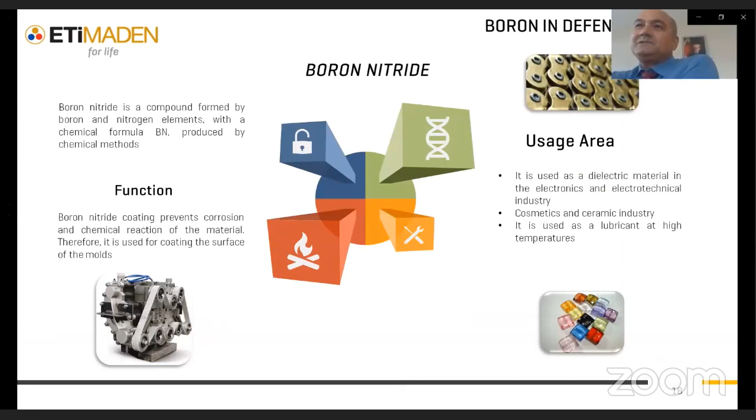This is a new area for rare earth elements for Etimaden, and a strategic move for the company. The most important known reserve of rare earth deposit in Turkey is the bastnäsite, fluorite, and baryte deposit located at Kızılcaören village of Sivrihisar district near Eskişehir province. Etimaden commences studies in accordance with the national know-how policies of our ministry for the improvement of this deposit for our country's economy, and studies are carried out in 4 stages.

First, in 2011, drilling studies were commenced for the identification of the reserve, and more than 130,000 meters of drilling has been made until now. Etimaden and MTA, the General Directorate of Mineral Research and Exploration, carried out studies by receiving consultancy from universities in order to gain each mineral at high purity from the complex ore and to determine their production processes. Now we are at the stage of building a pilot plant.

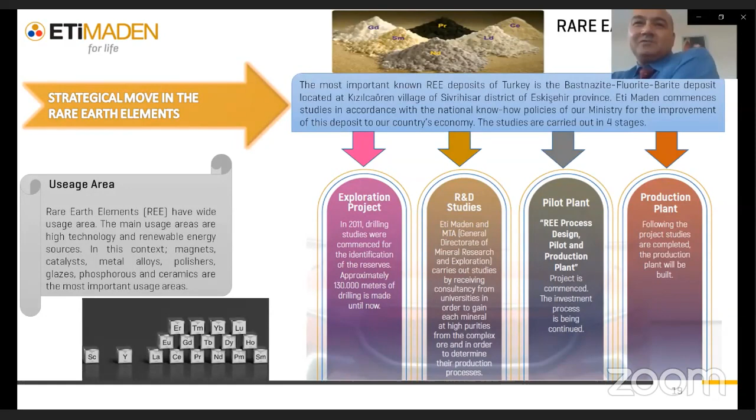Okay, this is the end of my presentation. Thank you for your listening.